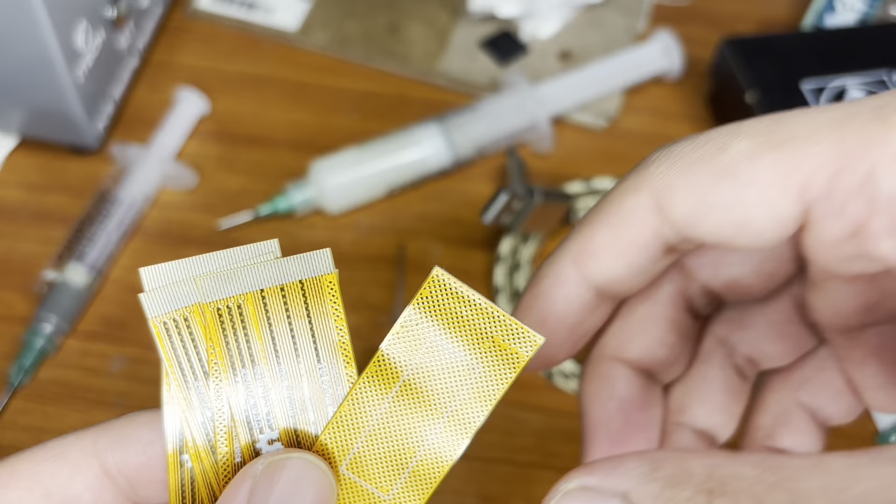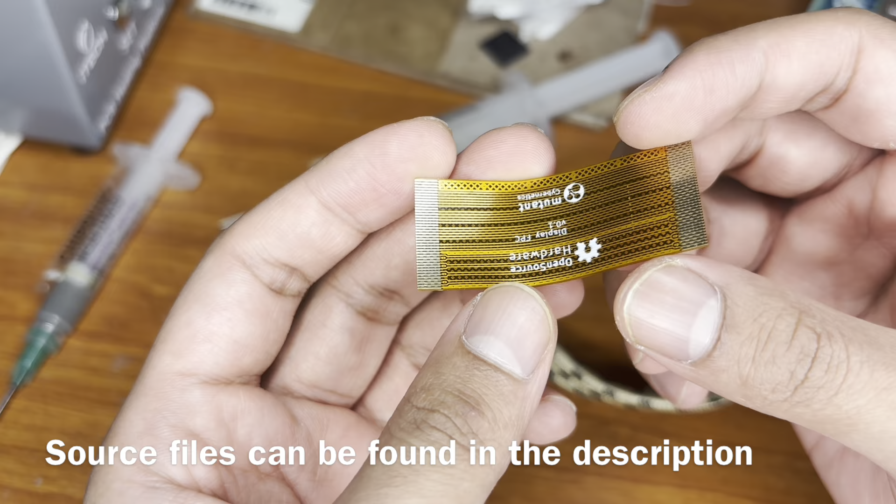So I will show you how to make this in KiCAD. So this is a 40 pin FPC cable, or flexible printed circuit, and you can make it impedance controlled. I will show you that also. And you also can have the PI sheet that will be on top of it like this.

I tore it off intentionally, and these are really strong, they hold together. So you want this kind of FPC cable if you want to have impedance controlled traces going from one board to another. So here is one of my PCBs.

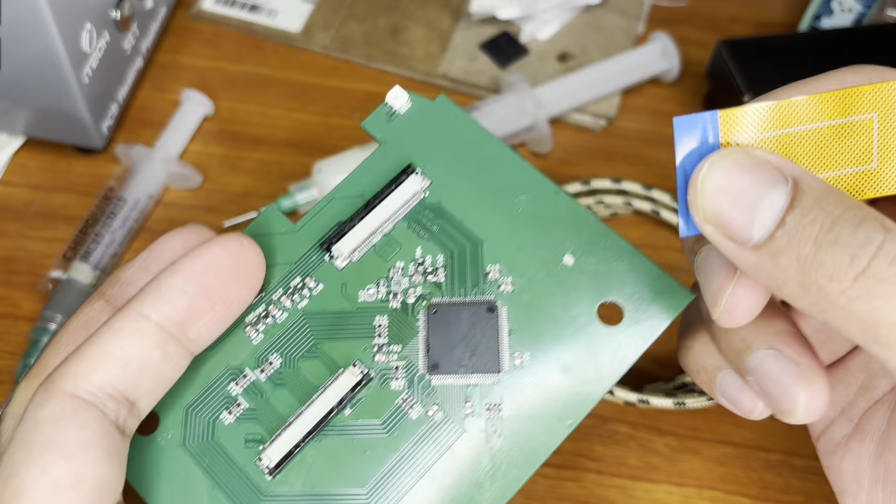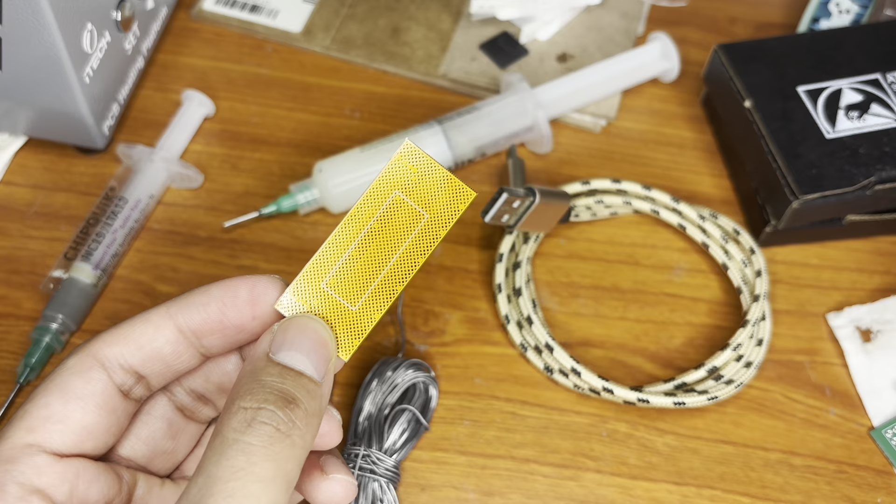So this has this IC that converts the HDMI signal to RGB for the TFT. So this HDMI signal needs to be impedance controlled. So I designed this FPC cable, that is a 40 pin FPC. So this is not the same as this one. This is flexible printed circuit, and this is flexible or flat flex cable.

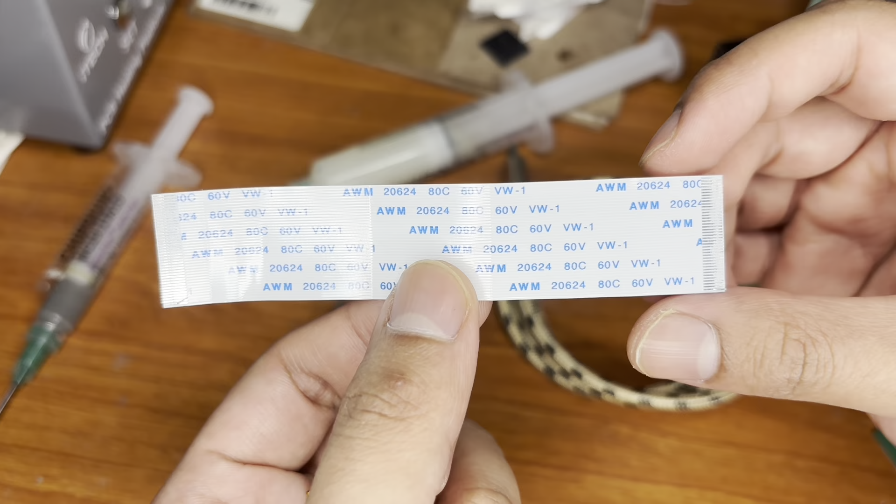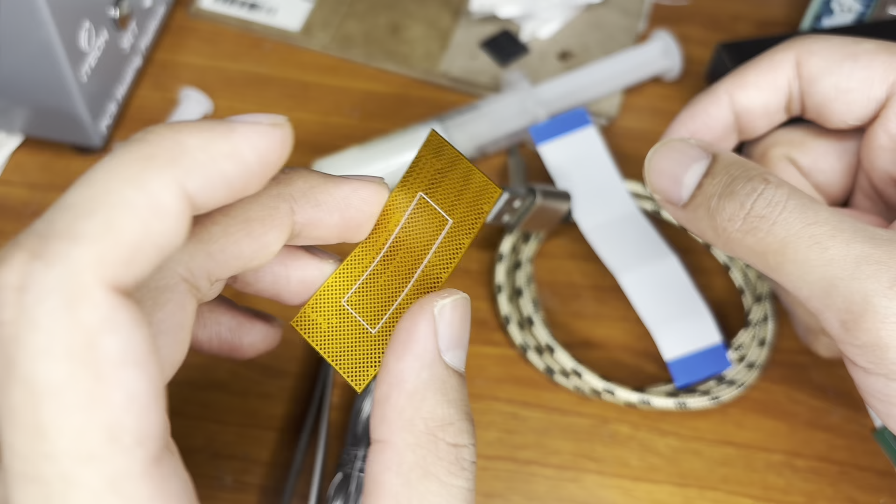So these don't have any impedance control. This one has impedance control, and you just want to use this to transfer non-impedance controlled traces. When it comes to designing this, it's not much different than designing a regular printed circuit board. So I will show you how to do it in KiCAD, and I will also show you how to order them in a PCB house, that is PCBway.

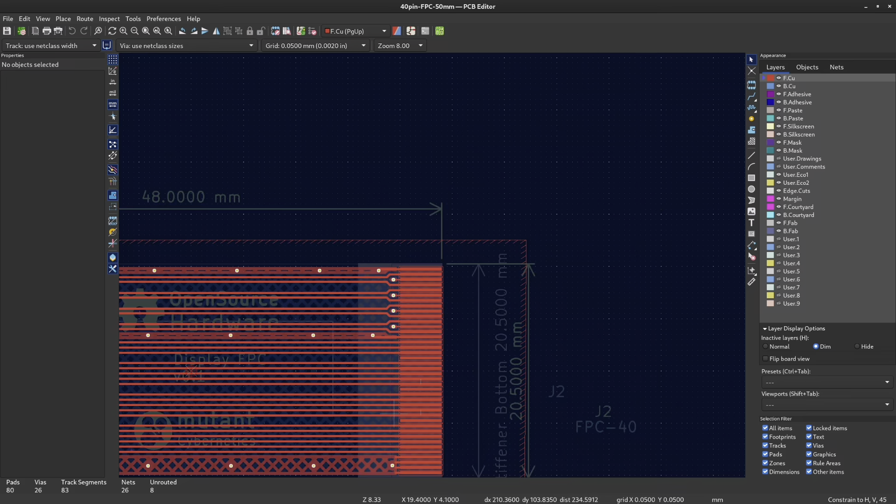So this is the FPC we will design today. Not exactly similar to this one, but I will show you how to do the connector, how to add a stiffener, how to do impedance controlled traces, and add the ground plane that you can see, this hatched ground plane. So first we will design the connector. To do that, we will go to KiCAD and we will design the footprint.

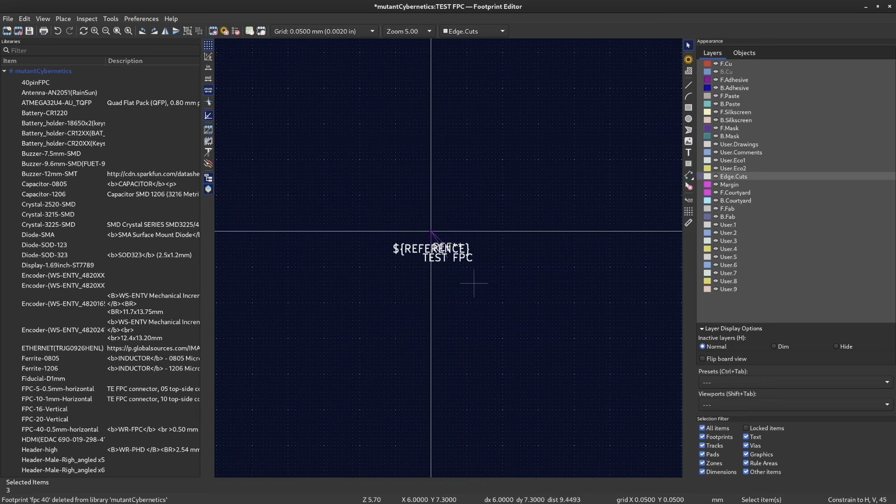So here is the footprint editor. Then we will make a footprint in our library by selecting the library, press this, then make a test FPC. So set it as SMD. We don't need those. Now first we will add a pad. That pad should be similar to the connector that the FPC will go into.

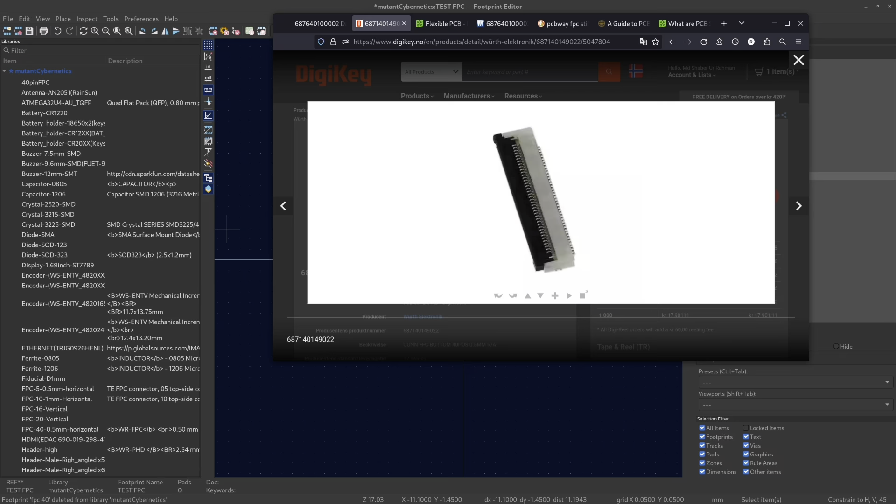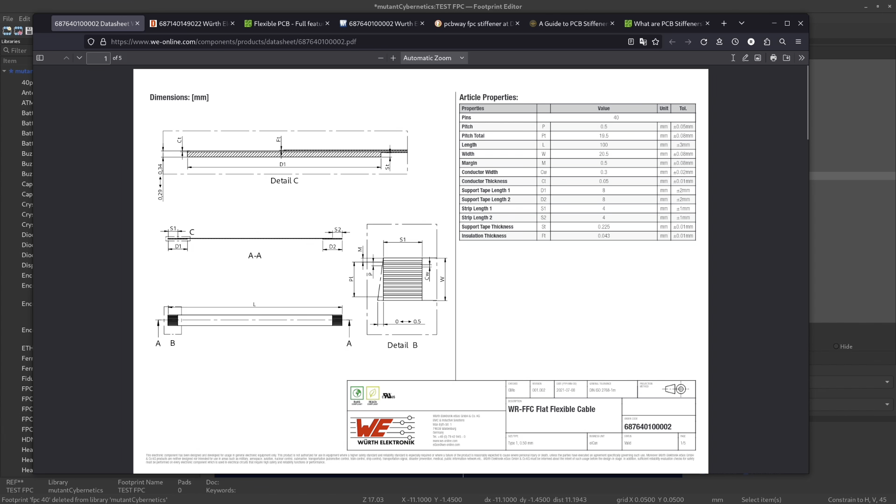So this is the connector where our FPC will go, and we want to see a similar FPC cable that goes to this connector. So this is the reference design I got from Würth. The connector has 40 pins, and each pin is 0.3 millimeter width, and the pitch is 0.5, and the length is S1, so strip length, that is 4 millimeter. So we'll design that according to the specs that we saw.

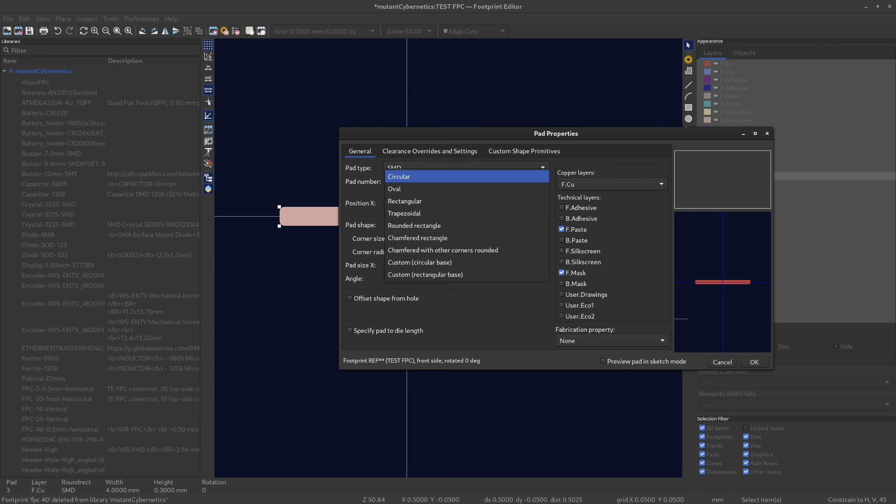So we'll add an SMD pad that goes here, then set the conductor length as 4 millimeter, then the width is 0.3, and make it rectangular. Now we will try to make an array of 40 of them. First set it to pin number 1. So by selecting the pad, then create from selection and create an array. So horizontal count is 1 and vertical count is 40.

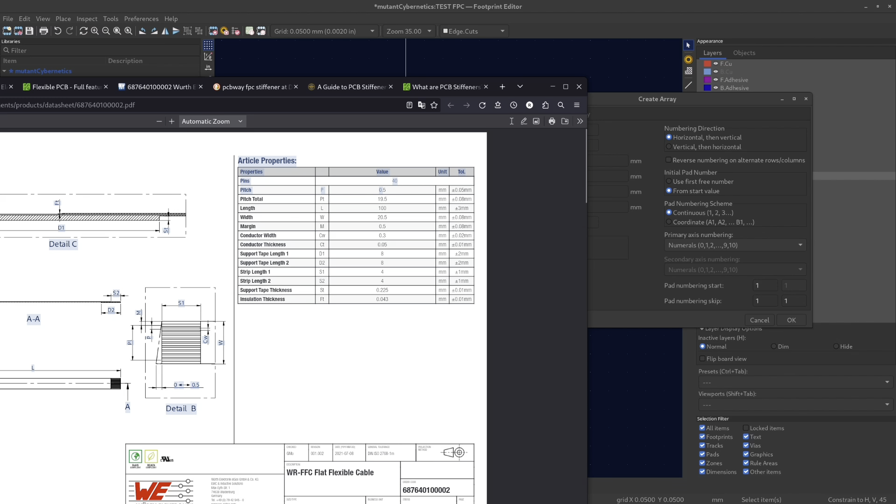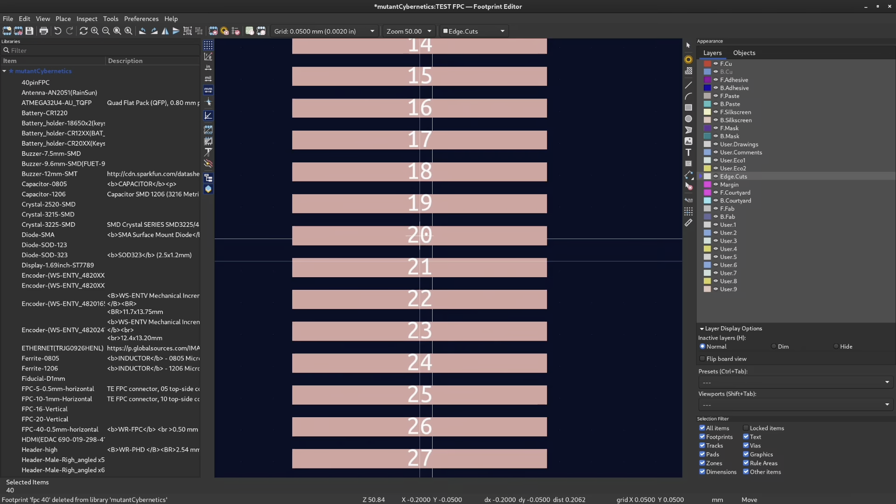And vertical spacing, that is the same as the pitch that we saw here, 0.5. Then same as the vertical offset, 0.5. Then we click OK. Then we have this. Then we want to center them in the middle, so in between 20 and 21. So if you set your grid like this, 0.05, then you can center them exactly like this.

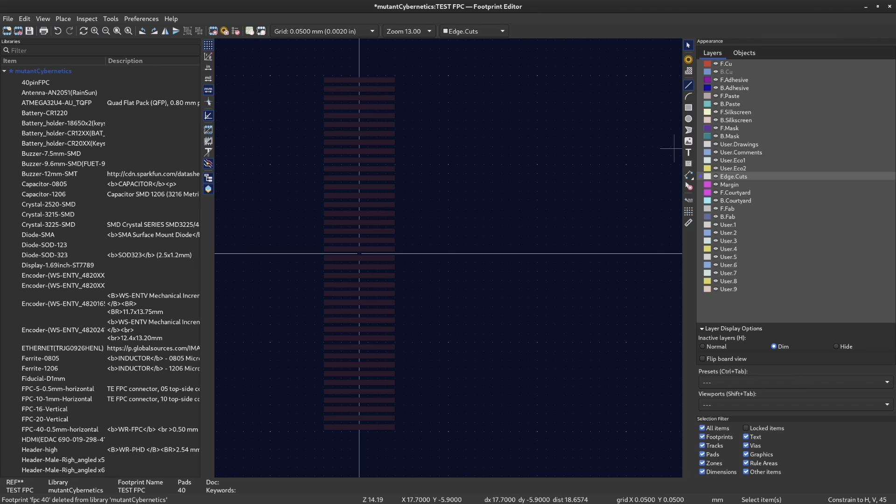Then we want to add an edge cut of this connector, so we will go to the edge cut layer, then set it as single layer mode. Then we will draw the front line or the front cut. We can set it like this. Then we can set the length according to the datasheet.

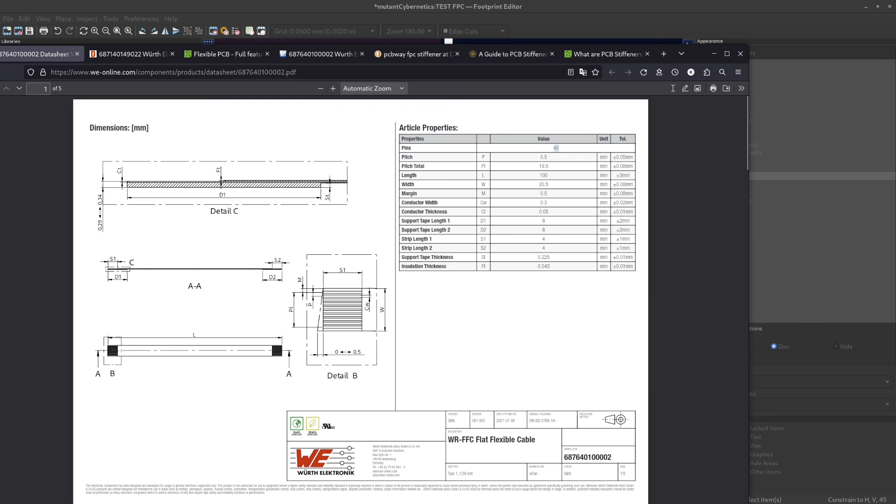We can see this is the width W, and the width is 20.5, that is for 40 pins. So we will set the same. To do that, we will divide in between these two. Then we have 20.5. So if we see the distance from this to this, that is 20.5.

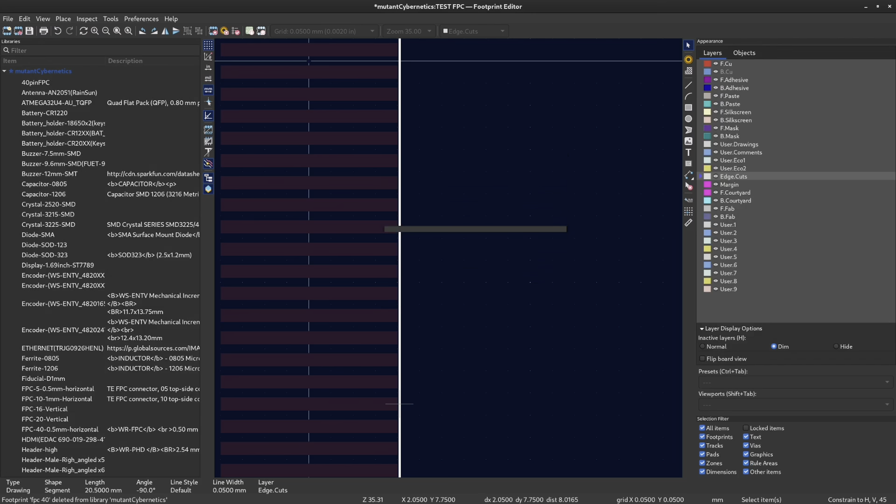Now this is our connector. Then we save this connector. Then we will add that connector. To do that, we will just add a generic connector. So we will set a connector generic, then this 40 pin. Then we will assign our footprint that we created.

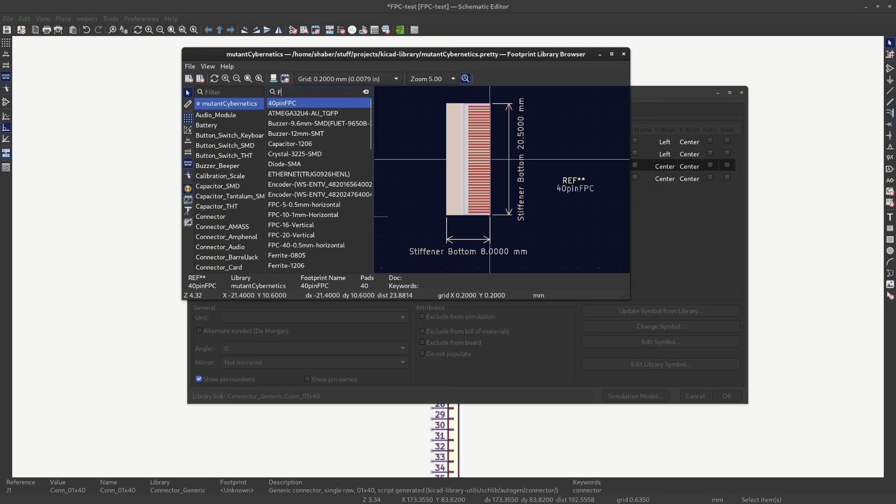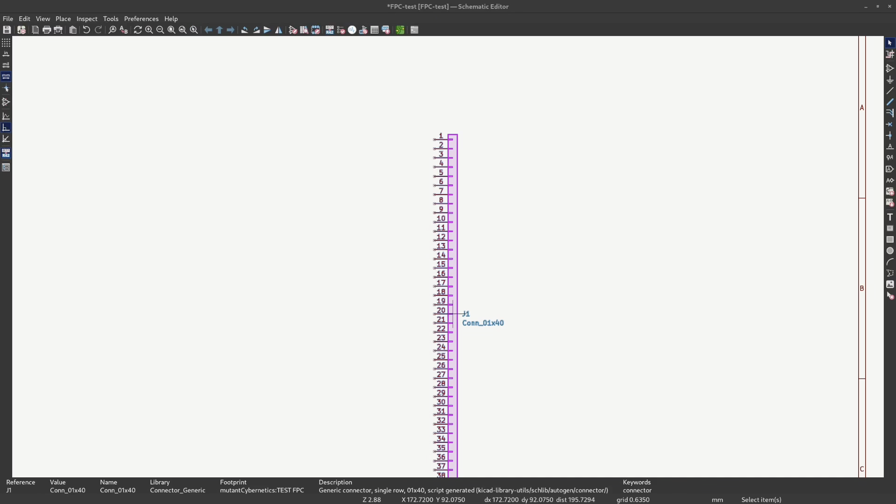This test FPC. Double press. Then this is here. Now we will go to the PCB editor. Then we pull our latest changes that we did in the schematics. Then we have our connector here. We need another connector on the other side, so we'll duplicate this, copy, Ctrl C and Ctrl V again.

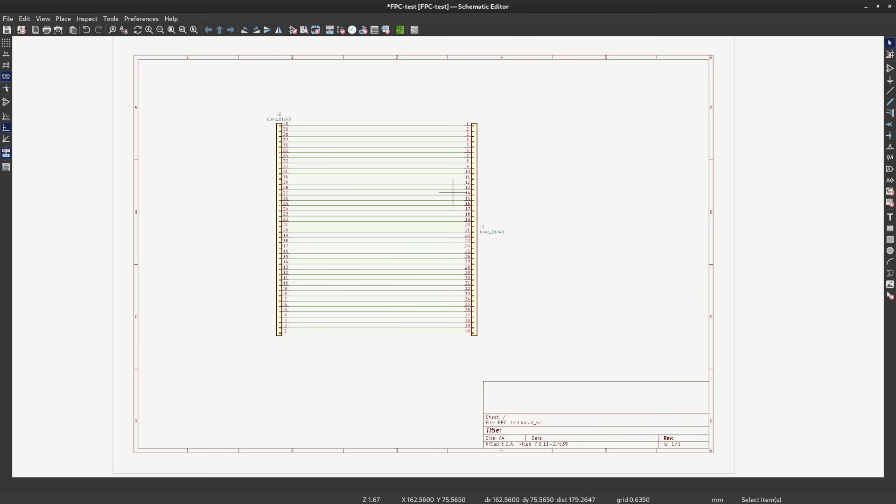Then we have this. Then to connect each of the pins to the other side, we'll rotate this and place it like this. Then we'll pull it apart. Then we have our connections like this. Then we go to our PCB editor. Then we again pull our latest changes. Then we have our other side connector. Then we rotate this. This is our FPC's connector on both sides.

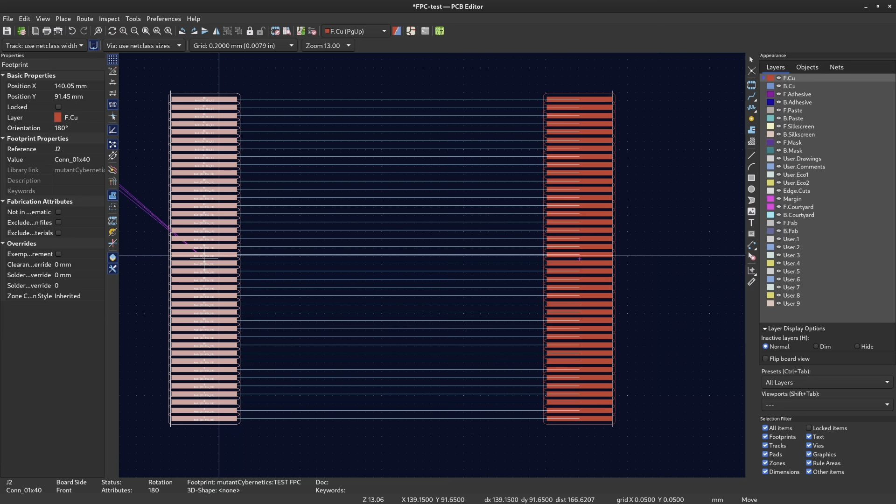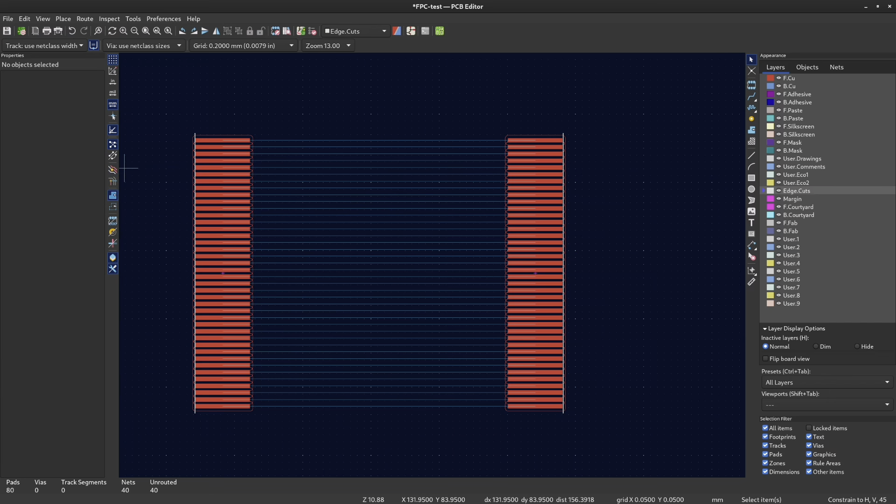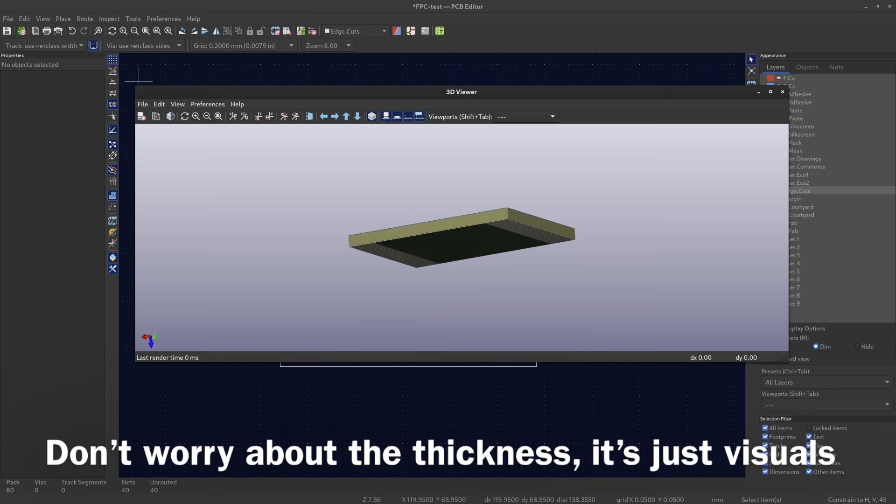Now we want to connect the edge cut, so it will create a closed loop. So we will get the area of our PCB. So we will go to our edge cut layer. Then remember to toggle the single layer mode. Then we will join these two edge cut lines together. Now this is a closed area. Now we want to view it in the 3D viewer. As you can see, this is a closed area of this FPC cable that we will make.

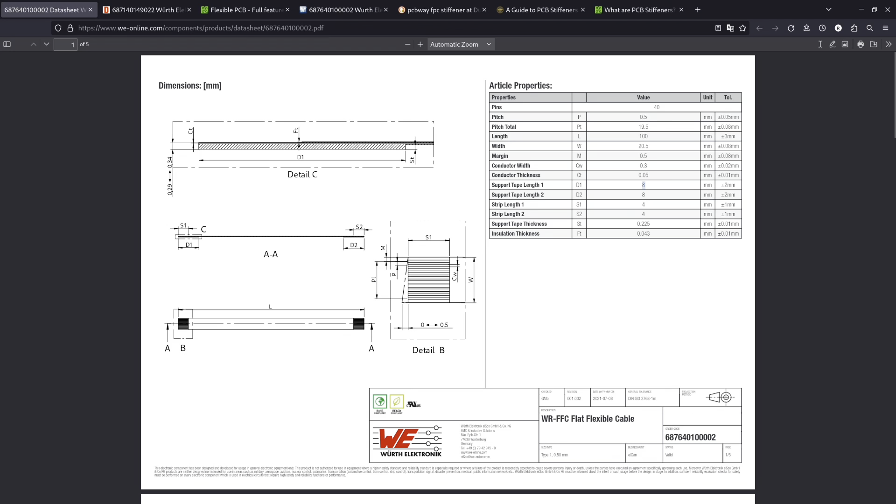Now we want to add the stiffener. So this is the stiffener, this blue part that I showed you in the beginning of the video. So we will specify the width and the length of this stiffener. To do that, we will get a reference from this datasheet. So stiffener is D1. This is the length. So stiffener or support tape. This is D1. That is 8 mm. And the width is the same as the FPC cable. So that is 20.5.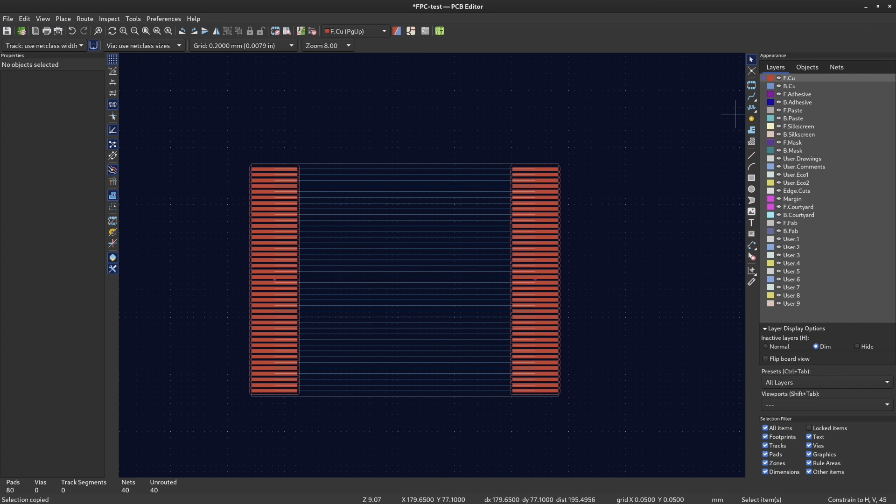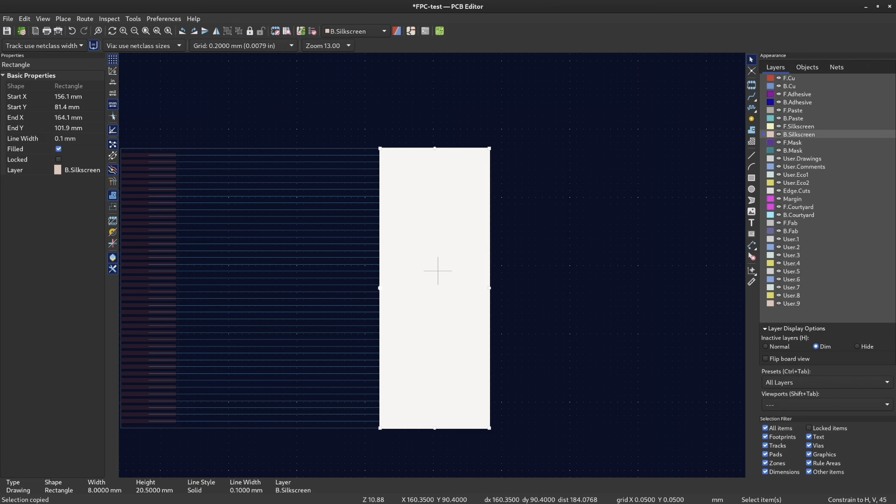Now we will define our stiffener in our FPC cable. To do that, we need to define the size in the silkscreen layer. So as we defined our conductor in the first layer, we want to set the stiffener on the other layer. So the other layer is the B layer, or the bottom silkscreen. Then we will resize it according to our own need. So 8 mm is the stiffener length. So this is 8 mm. Then we want to fill the shape also. Then we'll copy this on the other side.

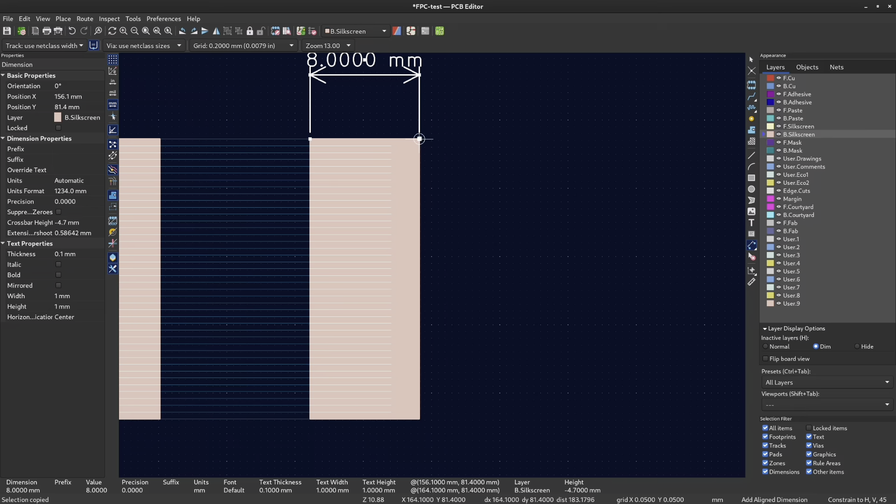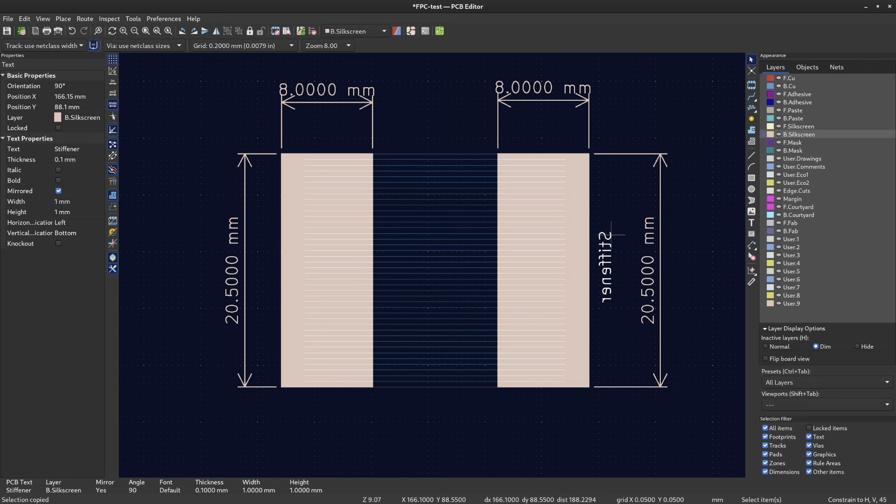We also want to add the dimensions. We'll go here, then like this we will add the dimension, so that's the 8 mm, and this 20.5, same as this side. We also want to mention this is the stiffener. To do that, we will add a text. Now the stiffener part is done.

Now we will move on to placing the traces. We'll just manually place the traces like this. So this is an optional part. I want to add these tracks as a differential pair. To do that, we'll go to the schematics. There are two methods you can use to define differential pairs. One is adding plus on the label, so 3 plus, and minus on the other line.

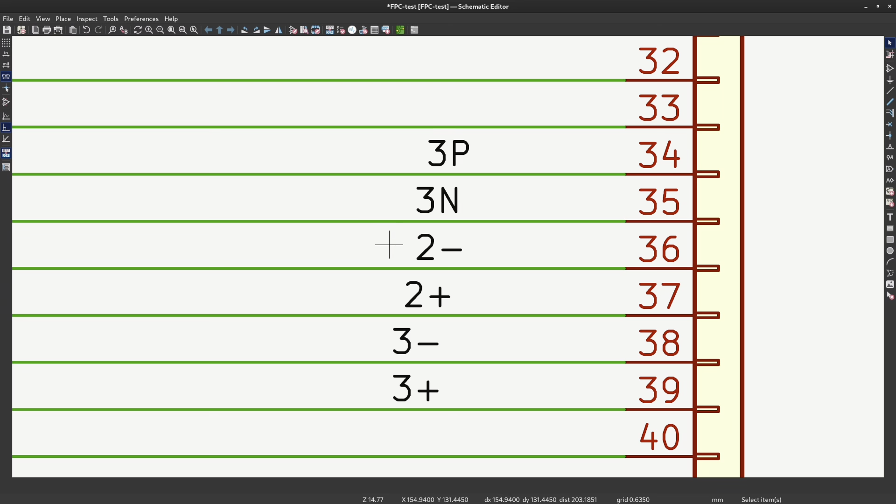And another way is adding N and P. So either you can add P and N, positive or negative, after the label, or add the sign plus and minus. So if you go to the PCB, then pull the latest changes, then you can see this showing as a pair.

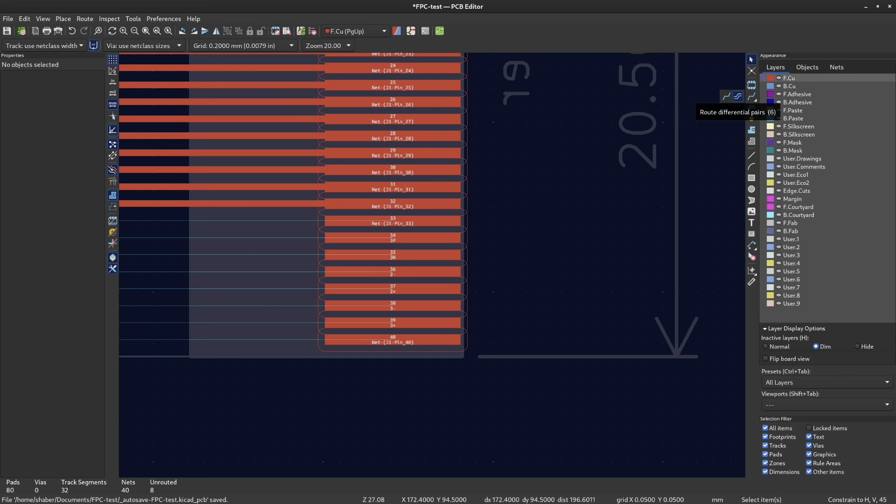Now you can go and select this and drag, then you will get two options, or press 6, then you select this differential pair routing, then you press, then you have these lines as a differential pair.

But for the differential pair, you also need to control the impedance. So to do that, we will go to the board setup, then net classes. So we will declare a net class called diff. Then in this diff, we will add our differential gap and width that will create our impedance.

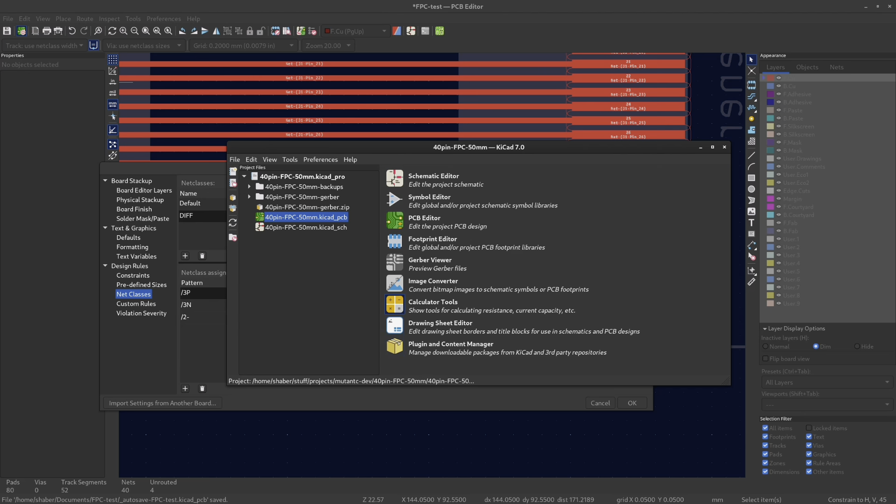You can calculate this width and gap of this differential pair using KiCAD's calculator. So if you press this calculator tool, then it will give you this calculator. And we want to have a 100 ohm impedance controlled differential pair. So to calculate what the width and the gap, the S, would be, we need to set first of all these parameters.

The main parameter is this height. So in impedance control, you need another layer on the bottom. So you need to see what's the height in between these two layers. To know what the H is, you need to go to your PCB fab manufacturer and see what the capabilities are.

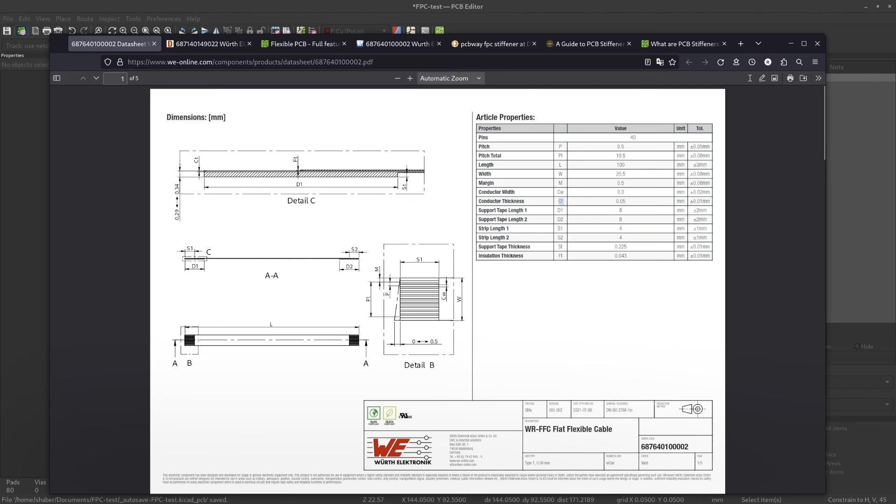So I'm using PCBway, and see this FPC thickness. They can manufacture in multiple thicknesses, but we will go to the specification of this datasheet that we are trying to follow. Then we can see this conductor T or CD, that is the conductor thickness, so 0.05. So we will go here, then they have 0.05. So our PCB fab can do 0.05, so we will use 0.05 here.

Then we will press this, then it will give us this. Then we need to see if our PCB fab can manufacture this width trace. So here is the minimum track spacing. It can do 0.06. So we need to increase this width more. So what we can do is increase the thickness.

So if we increase the thickness by 2 times, then if we calculate that again, then we have this 0.08. I will use this width and this spacing. So I will define these 2 parameters in the differential width, that is 0.08, and the gap is 0.04. Then we press OK.

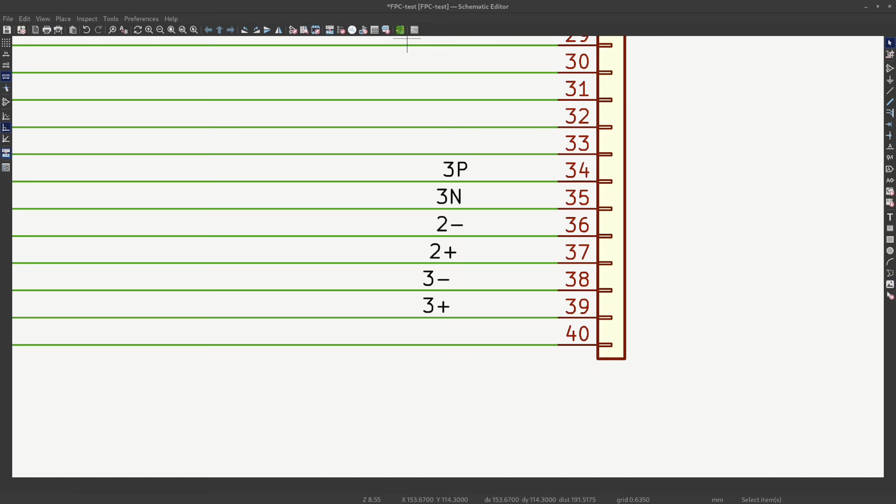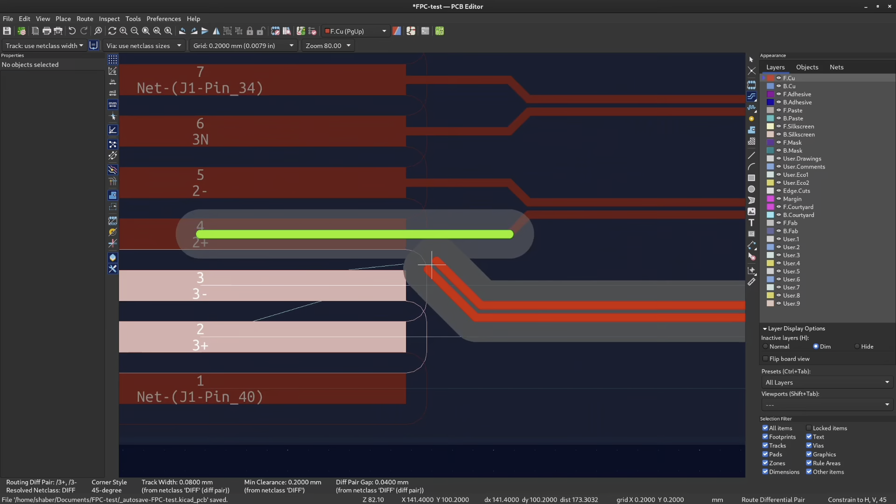Then we can assign that net class to these traces. So you select the trace, right click, then assign net class, then you set the net class to diff that we created. So you have to do it for each of them. Now we pull the changes, then route this line like this. So we have our impedance controlled traces, that is 100 ohm.

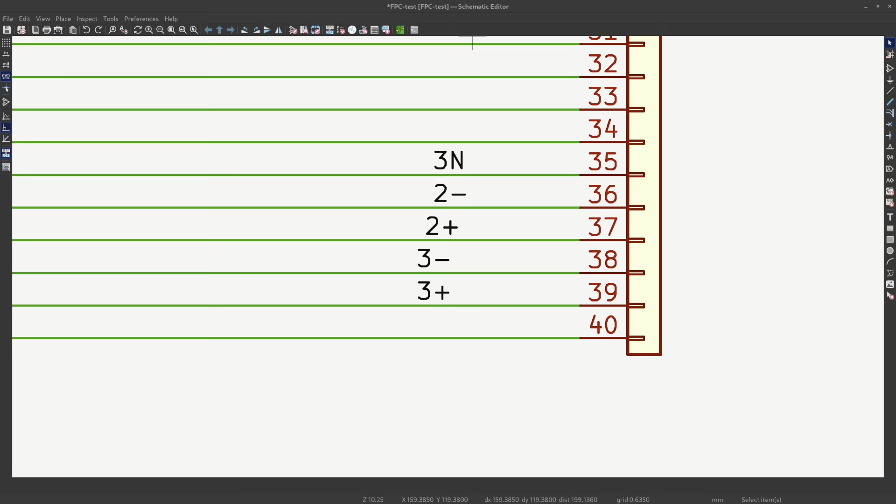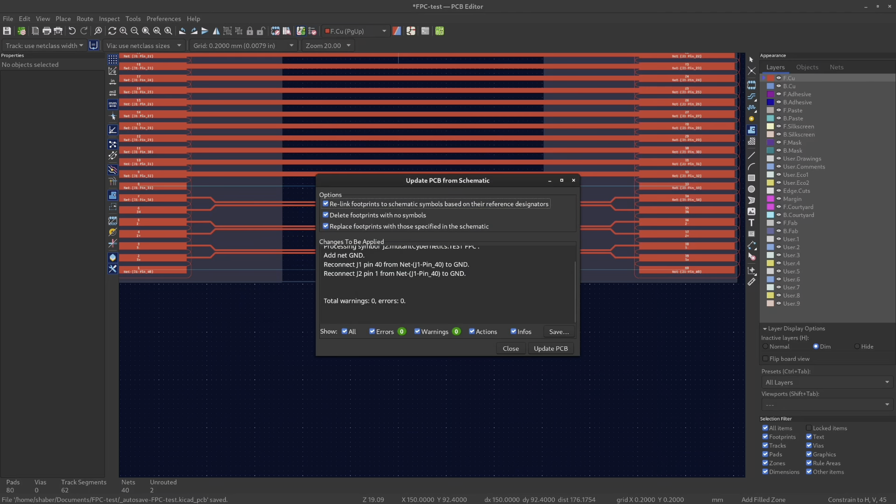And we need to have the other plane that is shown in the calculator. So that plane can be either a ground plane or a power plane. So we want to go here, then we will add the ground plane symbol. So this ground needs a reference, so I will get this reference from this pin by connecting it here. Then I will pull the changes, then again I will define the zone.

Then draw the infill, then press B, and that will create this filled zone. Then you can see this zone here. Now this solid plane is not good for a flexible PCB, because when you try to flex it, it can get a crack after too many flexes. So we want to reduce that fracture by making it a hatch pattern.

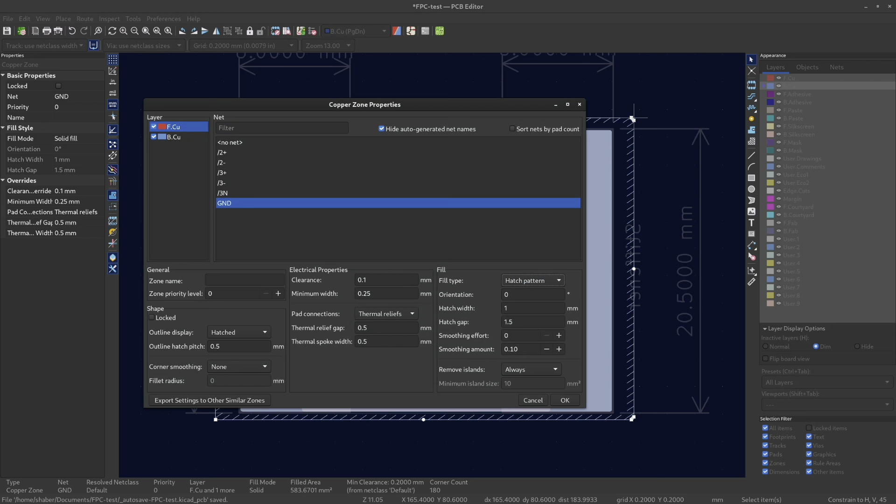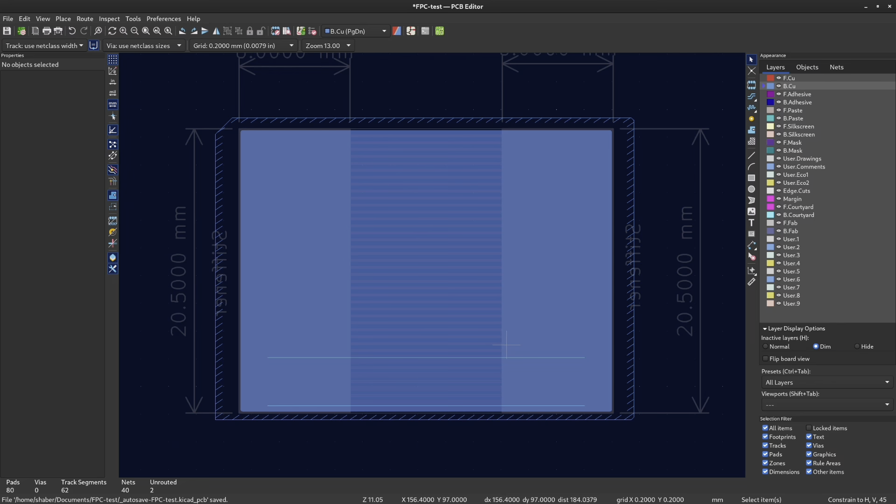So we will make a hatch pattern with the orientation of 45, then the hatch width and the gap should be the same. The minimum hatch width you can do is 0.25 millimeter, and the same is true for the gap. Then you press OK, then press B again.

Now you can see this hatch pattern, and we also want to set the gap in between the edge cut and the copper, by going to board setup and constraints, and set this copper to edge clearance. So that is now set to 0.1. We can set it to 0.05. Then we rebuild the pattern again, so it is much closer now.

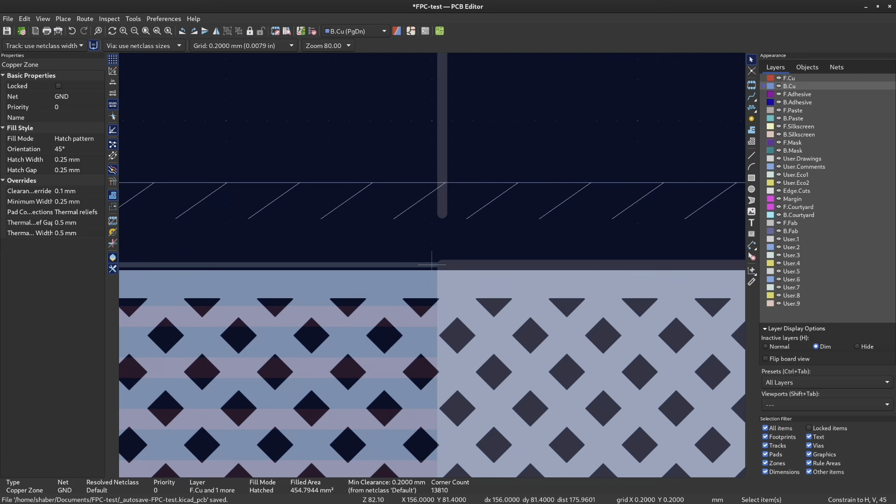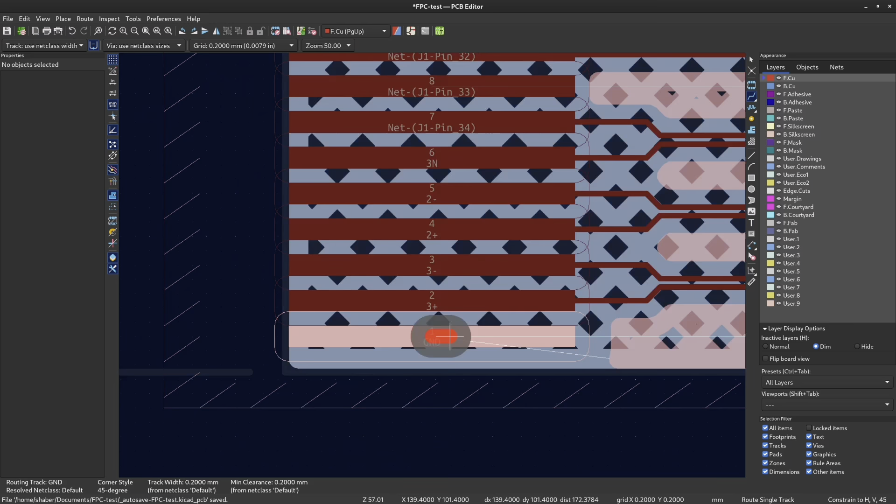Now we will connect this pin 40 directly to the ground plane. So first we need to connect this pin 40 to the plane by simply doing this on both sides. Then we want to connect this top plane to the other plane using vias. But you need to see what's the capability of the fab for creating vias in these flexible PCBs.

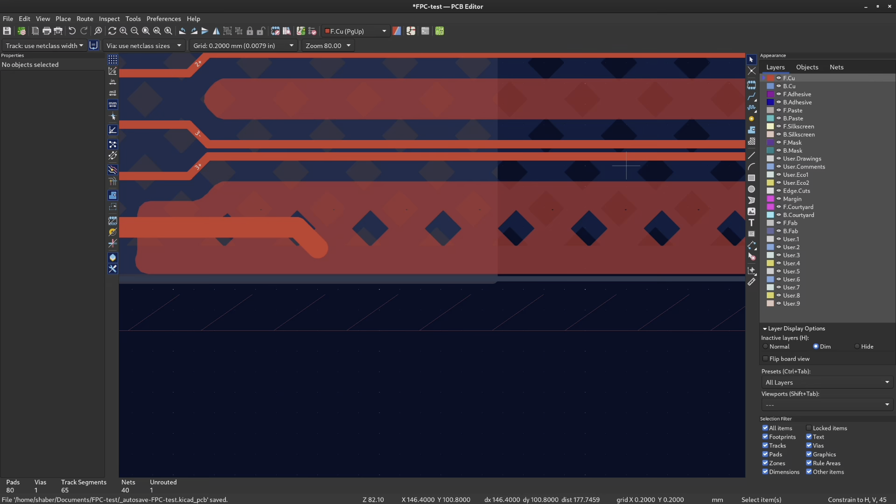So we will go to PCBWay. We will see what via size they can make. So the hole size is 0.15 and the diameter of the copper is 0.35. We can see the via specification from the board setup and net class. So this is the default via size and hole.

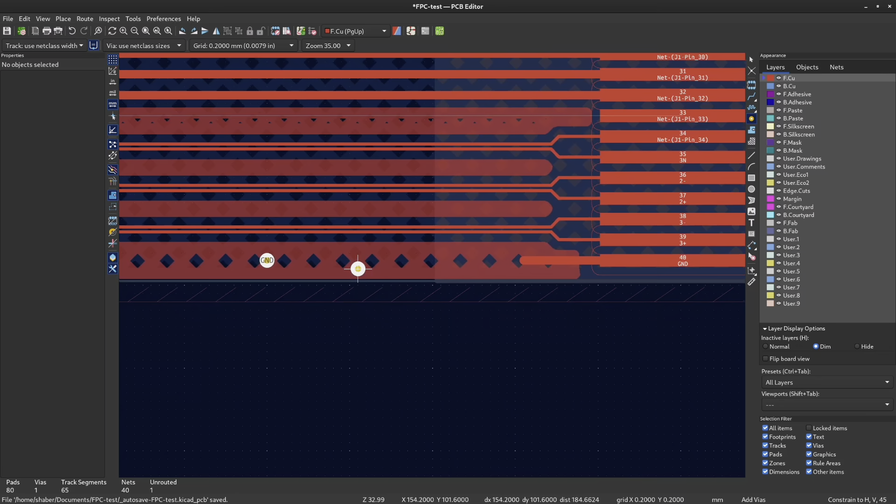So we set the hole to 0.15, same as our fab capability, and the size is 0.35. So we press OK. Now these vias are according to our fab manufacturing capability. These vias will now connect this layer to the other side. Now we will fill it again. Then we have these vias passing our ground plane to the other side.

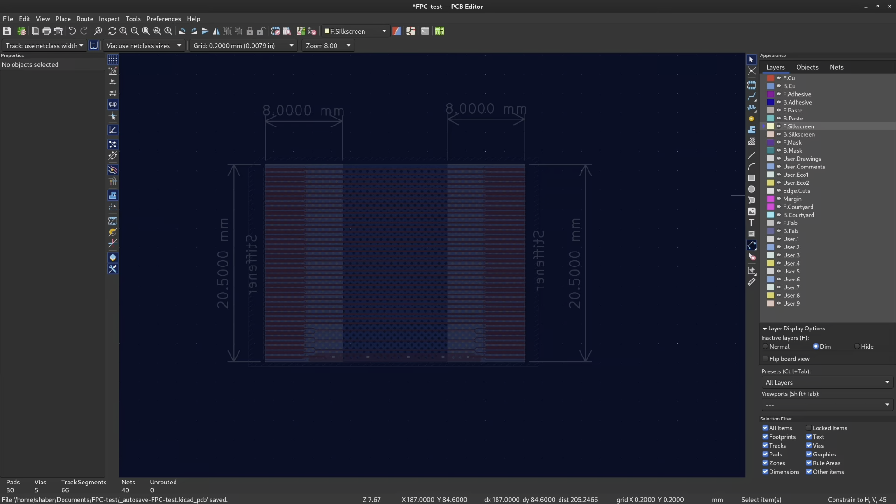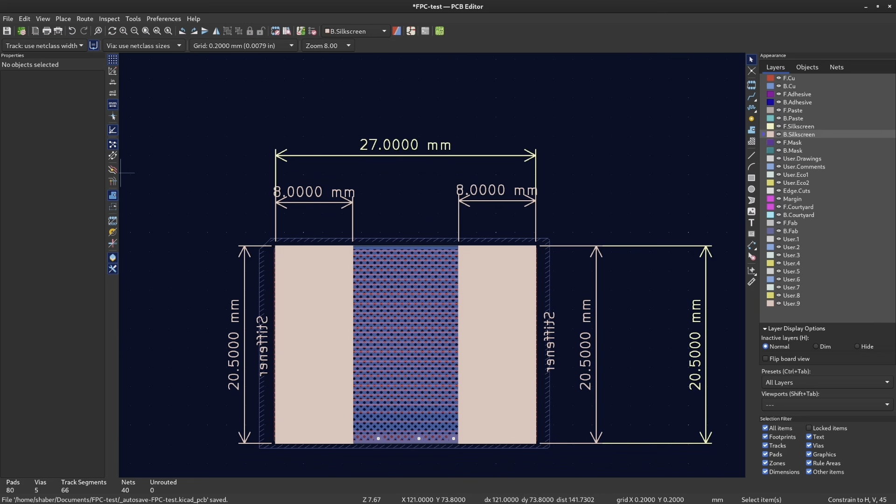You can also add the dimension of the PCB itself or the flat plates. That we can do in another layer, the front layer. So this layer is defined in the front silkscreen layer. Then the stiffener was declared in the bottom silkscreen. So if we see the single layer mode, this is the bottom layer where the stiffeners are defined, and this is the size of the whole PCB.

Now we will generate our fabrication output, so Gerbers. First we will set the folder where the Gerber files will be. So I made this folder. Then set it as a relative path. Now we'll press plot. We'll refill it again. Then generate the drill file. Then close.

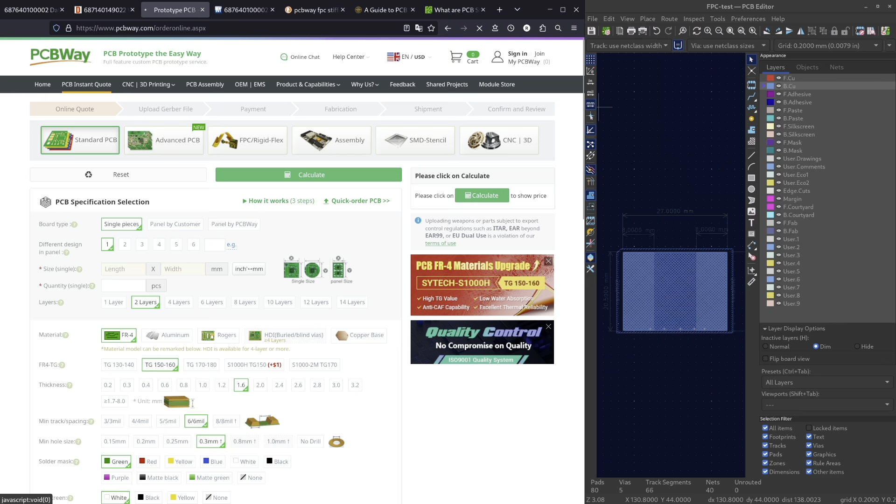So now we will order our FPC from our PCB fab, PCBWay. So we will go to their website homepage. Then we will go to PCB instant quote. Then select FPC/rigid-flex. Then we will set all the parameters according to our own design. So the PCB type is flexible PCB. Design is only one, and it has two layers, 1 and 2. So 2 layers.

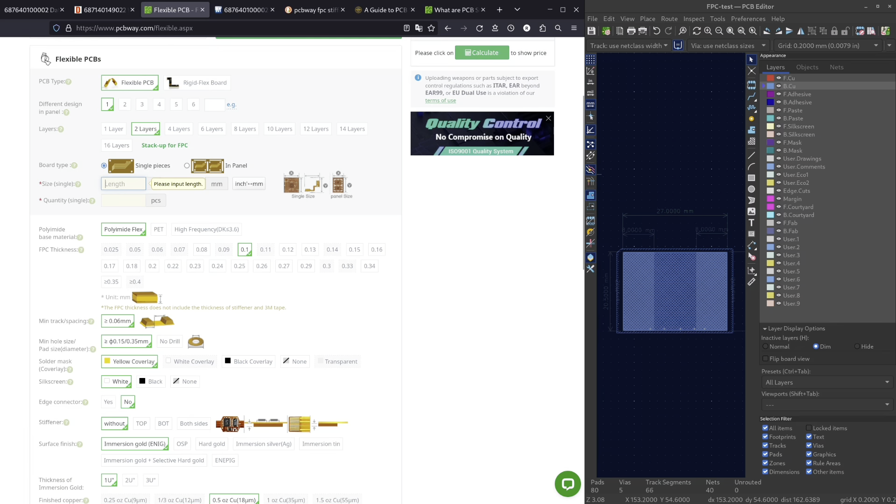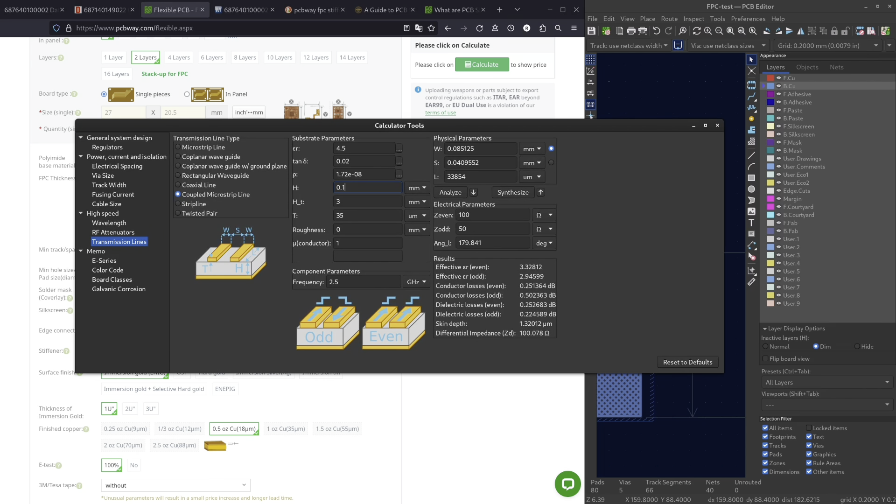So we will set the size. For us it's 27 and the width is 20.5. And the pieces, we want 5 of them. Then we will set the base material as it is, polyimide flex. Then FPC thickness: we calculated our impedance using 0.1 thickness. So this is the H. So we will set it to 0.1.

Then the solder mask, we will go with yellow. The silkscreen is white. The edge connector, we set it to no. Then the stiffener. The stiffener we designed goes in the bottom silkscreen or the bottom layer. So we'll set it to bottom. Then the type of stiffener, we will use PI.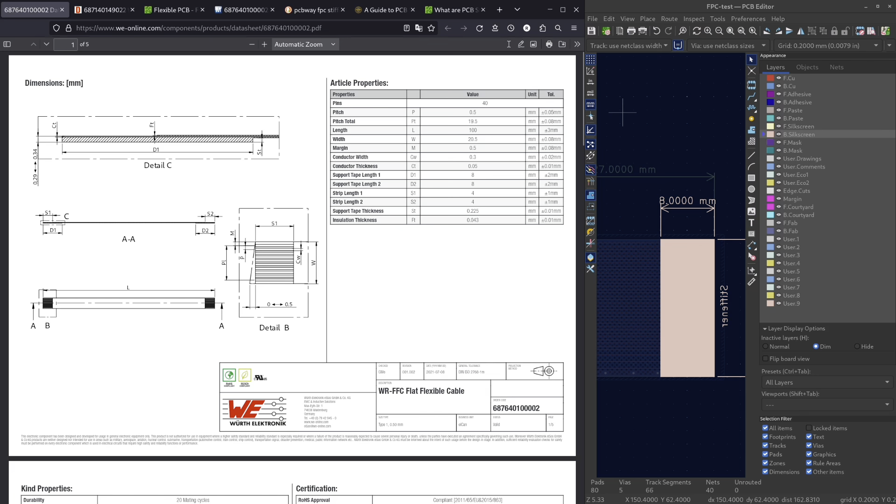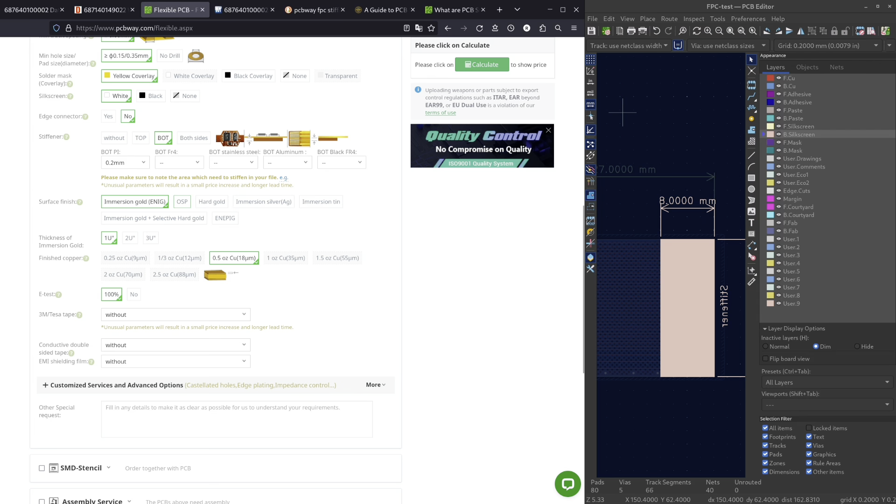Then the thickness of this PI, we will follow the specification or the design reference we use. So that is ST, or the support tape thickness, which is 0.22. So we will use the closest to 0.22, this one, 0.2. Keep the others as they are, or blank, because we are only using PI. For the surface finish, if you change this, the price may vary. So I will just go with immersion gold, and the thickness and everything as default.

Then if you go to calculate, it will show you the price. Then you press save to cart. Then it will ask for the Gerber file that you made. Then you upload the Gerber file, this. Then you submit the order. Then it will create this. Then they will check your order. Then you will get a message. Then you can pay for your order.

So this is the whole method to make an FPC cable according to your specification. As you can see, this is very simple to make, and you can make a customized FPC cable that can be used for any simple to complicated PCBs. Thanks for watching.